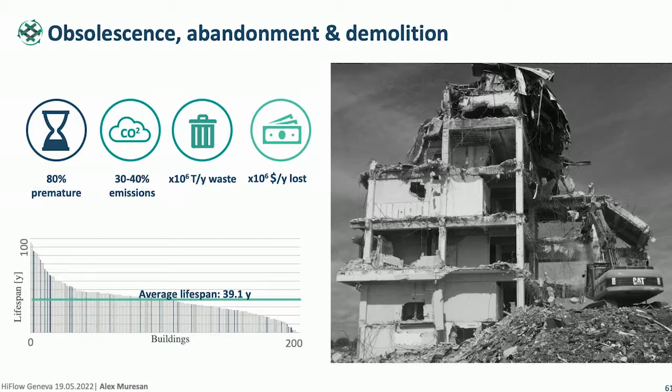We conducted a study a few years ago on 200 demolished high-rise buildings, and we found out that the average lifespan is no more than 39 years. In 80% of the cases, they were prematurely demolished, meaning that they had not reached their prescribed lifespan of 50 years. Of course, the CO2 emissions from the construction industry have already been discussed by Corentin, and are pretty important. I just want to mention that most of the embodied CO2 emissions released into the atmosphere for the demolished buildings are still affecting the environment, but the buildings don't exist anymore. So keep that in mind.

Besides that, millions of tons of waste are produced every year due to demolitions, and also millions of dollars are lost every year in residual value that cannot be recaptured.

Now, I have a question for you, and I would like you to think: who do you think is responsible, in the case of a building, for the CO2 emissions or the waste at the end of life? Is it the owner, the investor, the end user, the architect who designs it, the engineer who plays an important role, or the manufacturer of the material who emits CO2 in order to produce those materials? Who do you think it is?

Yes, the responsibility is shared, of course, I agree with this, but there is a problem with that. If you have been in a construction project, when something goes bad and someone has to take responsibility, this is passed along the value chain and no one takes responsibility, and they have to go to court to decide who was responsible. This is one problem, and the other problem is, by having so many stakeholders involved in one project, the responsibility is diluted. So the problem doesn't seem that big anymore. The importance of the problem is so low that we don't try to solve it in terms of CO2 emissions and waste.

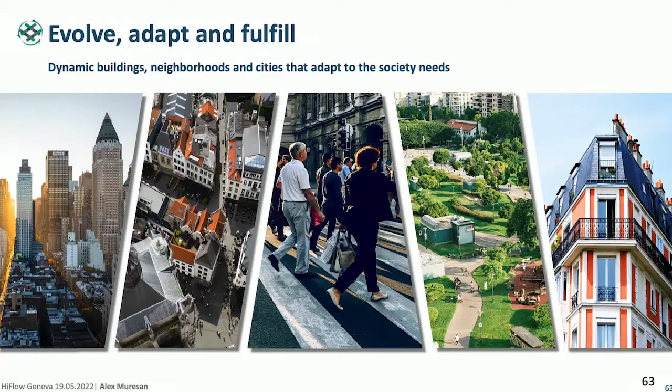This is a problem. Our mission at Eternum is to solve this problem, and to make buildings more dynamic in order to evolve, readapt, and fulfill the user's needs, and also to extrapolate this to neighborhoods and even cities that are able to adapt and change according to the needs of the society around them. And besides that, we want to do this without any negative impact on the environment in terms of CO2 emissions and waste. This is our mission at Eternum.

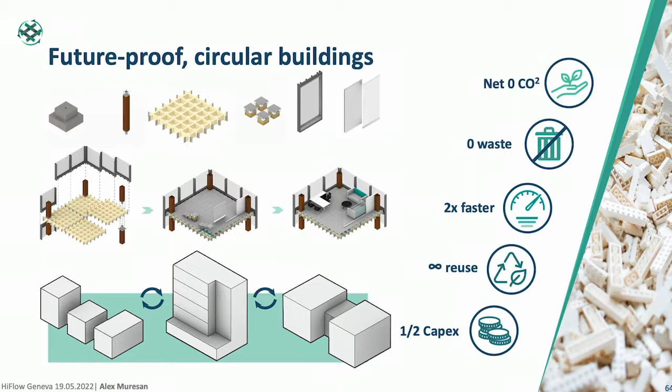How do we do that? We are developing the Lego system that you mentioned earlier. It's a kit of parts, of components that can be assembled together to create the volumes and spaces that we need without constraining the shape of the buildings or the floor plan layouts, and most importantly, able to be reused and readapted over multiple life cycles in different configurations. Our aim is to offer buildings, in the end, as products that are carbon neutral from the beginning and that do not produce any waste during the life cycle and at the end of life from demolition.

We believe our building solution is at least twice as fast as any conventional building system in terms of execution. We offer unlimited reuse and readaptations, and by dividing the initial investment in an asset that can be reused over multiple life cycles, let's say 3 life cycles, the cost per asset is at least half of what it is right now on the market. So economically, it makes much more sense to invest in something that can be reused. Besides that, our goal from the beginning is to have a very competitive price, and I will show you how.

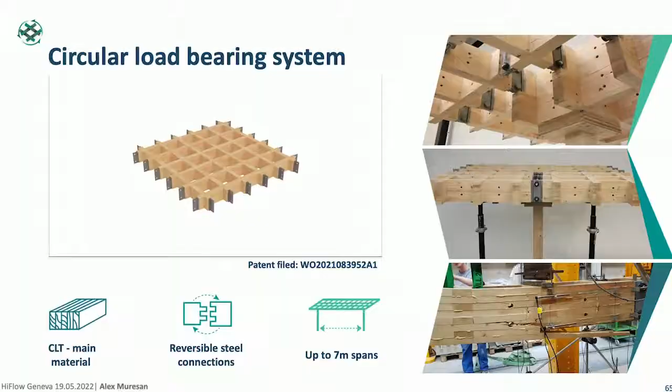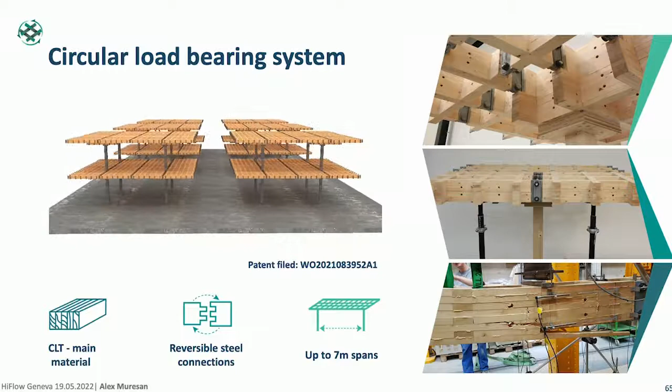Here is the circular load-bearing system that was developed at EPFL during my stay here together with Corentin Fivet from SXL. You can see in this video how these Lego elements are combined together in different configurations and in different types of buildings. We have a patent application going on right now, and the main material is CLT. We want to use bio-based materials as much as possible in order to reach the goal of carbon neutrality. We use reversible steel connections to be able to disassemble and reassemble everything. And we can currently reach spans of up to 7 meters in one layer.

You can see some pictures on the right side. There's our first prototype of the slab system, and on the bottom, we've conducted mechanical testing in order to make sure that it fulfills all the requirements in terms of structural safety and so on.

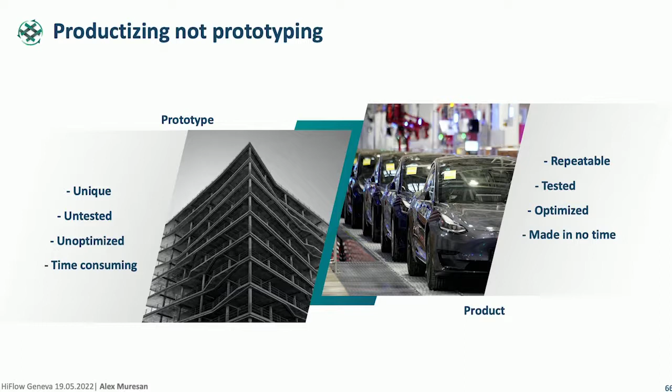So another point that I want to raise is the fact that every single building is a prototype. Every single building is unique. This one is unique even though it may look like the other one, even though the spaces inside are very similar with the other one, it is unique, and it has not been tested for the users. We don't know how the users will use it until the building is being built.

Besides that, it was not optimized for this, and it is very time-consuming in terms of design and also in terms of execution. On the other side, if we think of products, products are repeatable. Products are being tested already many times, and they are optimized for the user experience and also for reducing the material consumptions and waste, and also are optimized in terms of time, so we can make them in relatively no time.

Another very important point that the product is related to the question that I asked you earlier. For a product, you can clearly pinpoint who is responsible for the CO2 emissions and for the waste produced by that product. So therefore, we want to offer products. We want to be responsible for the CO2 emissions of these products. We take responsibility and accountability for the waste produced by the products that we plan to offer.

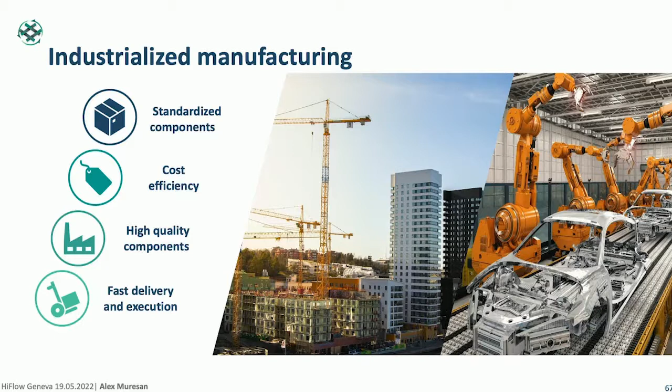As I showed you earlier, the Lego system, and also Frédéric said earlier, the standardization of the components is very important. This is a topic that I want you to keep in mind, because we are able to manufacture everything in line without knowing the details of the buildings they will be used in, which will increase the cost efficiency, as I said earlier. We will be able to be competitive in terms of price from the beginning when deployed at scale. Besides that, we can offer high-quality components and also fast delivery and execution.

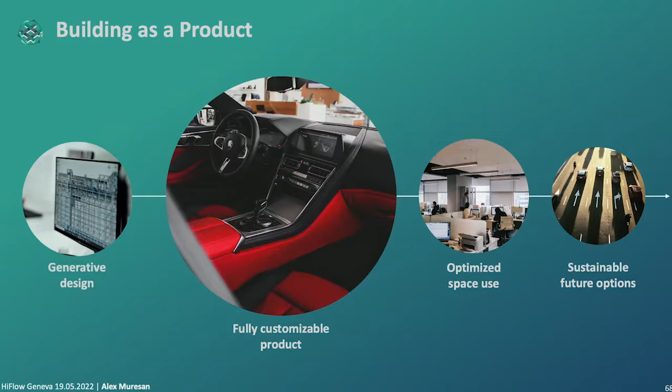And coming to the building as a product, we want to offer the customer, who is the one who pays, a very similar customer experience as acquiring a brand new car. Fully customized according to his wishes, give us all the details. We use our digital tool that uses generative design to create quickly the design of the building, and then quickly manufacture everything, ship everything to his site, and build it in no time. And then he can already start to return his investment.

Besides that, we stick with the customer in the long term. We offer other services like monitoring the building and optimizing the spaces, or reuse the components inside the building to improve the user experience. And then at the end of life, we also come and offer him the possibility of choosing what are the future options for his components, how to recapture the value of these components, whether to sell the components to someone else, whether to reinvest these components in other buildings, or we can even buy them back and use them in new products and projects on our side.

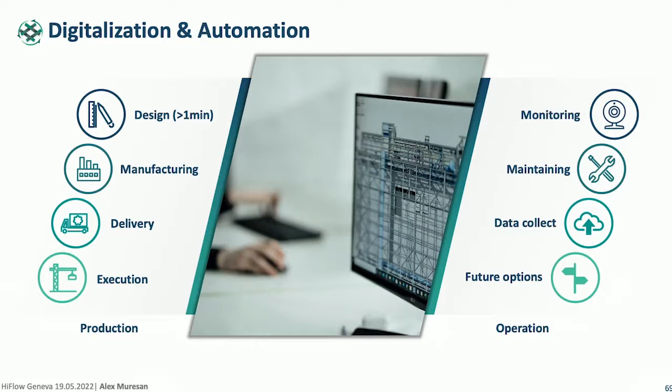A very important topic that was also raised here is digitalization and automation. For us, digitalization is not the end goal. It's just a tool in order to give products that are better performing for the user and much simplified. The whole process becomes much simplified and reduces the times and so on. We believe that after all the inputs are given, all the restrictions, all the constraints are introduced, the design should not take longer than 1 minute for a whole building. Because we know how to do a building, we know everything that is required in a building.

And then we want to apply digitalization and also automation in the manufacturing, in the delivery and the execution process to make it much faster. But this is in the production phase. We also want to be able to do it in the operational phase. We want to monitor the building, to maintain it, to collect data from the sensors, and to improve the way the building is being used, and to improve the user experience inside the building.

Besides that, we will have a database with all the components being used, and we are able to quickly offer future options on what happens with these components, how to be reused in other projects, how to be revalued, so to say.

Our business model is very much comprising this whole idea that I showed you earlier. We want to offer building as a product in an upfront cycle under a competitive price tag, which includes these services of design, manufacture, delivery, and build in one product, in one package. But then we stick with the customer to offer monitoring, readaptation, and optimization services for an annual recurrent fee. And then we come at the end of life and offer him solutions to recover and recuperate the value within the components.